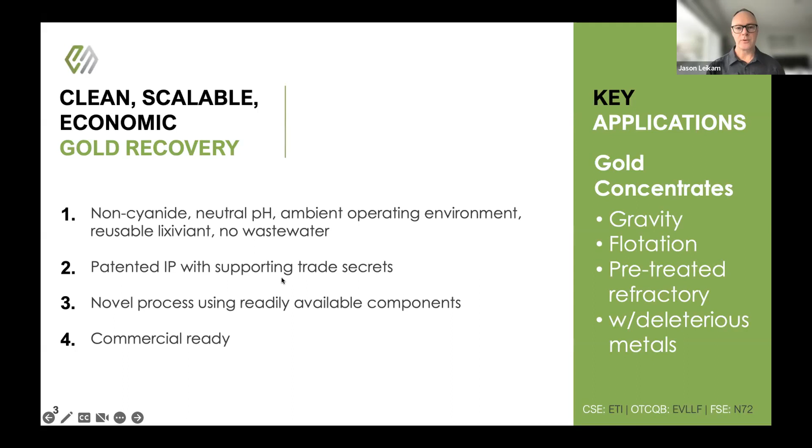We are commercial ready now. And so we feel that the MICA funded project of this recovery plant demonstration circuit will not only deliver continued operational data, but produce improved revenues for our mining partner. The question is, why would mining partners want to consider EnviroMetal? Again, the answer is simple, because if they spend the time to investigate, they'll learn that we can help them improve their revenues on site.

We enable our mining partners to gain greater control because of additional on-site gold recovery. And that's certainly important versus the shipment of concentrate for processing downstream, usually offshore to smelters, incurring costs, treatment charges, sometimes penalties, and certainly shipping costs and the associated emissions related to those endeavors.

Furthermore, our scalable solution enables gold miners to develop deposits where cyanide might be banned, or cyanide is opposed by local stakeholders and communities, or requires very lengthy permitting process timelines. So we can deliver efficiencies in those situations as well. Our process reuses its lixiviant indefinitely. It operates in a closed loop environment, and, as I mentioned, produces no wastewater.

And this wastewater issue, of course, is of particular importance in arid regions, whether that's Nevada, for instance, even California, throughout South America, where gold mining operations are located in areas where there's restricted water use or just a lack of available water. So these operating parameters serve to reduce the maintenance, the monitoring, the remediation costs, but also reduce the environmental footprint for those gold mining operations.

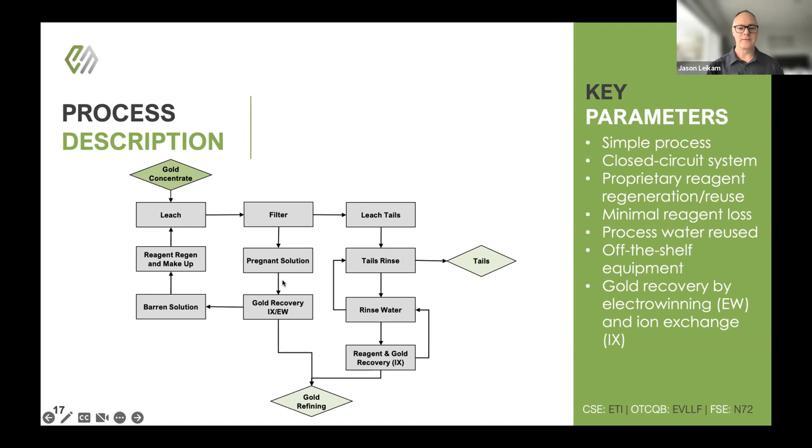At the end of our process, we recover the gold effectively from electrowinning, ion exchange, or a combination thereof. Well, how do we compare to, I've got a freeze here. How do we compare to the incumbents in the industry? How do we stack up against cyanide is a really key question that many of the mining companies that approached us ask, one of the very first questions.

Here's one example of how we compare. In most cases, we demonstrate superior leach kinetics than cyanide. And in many cases, our recoveries are as high or very comparable, in fact, sometimes superior to that of cyanide. In each use case, though, we test the concentrate material to optimize our process for that specific material. We acknowledge that no two mines are really the same when it comes to mineral processing. There could be mineralogy issues associated with even how they affect our lixiviant. So we go through testing in consideration of pH balancing, pulp density, residence time, reagent concentration, and recovery calculations.

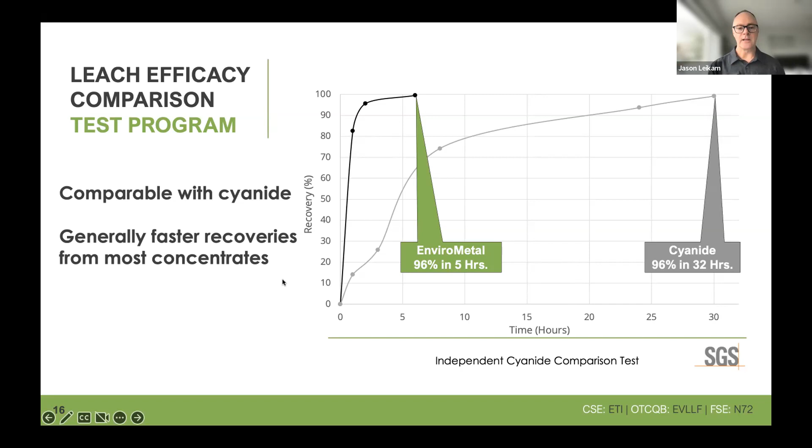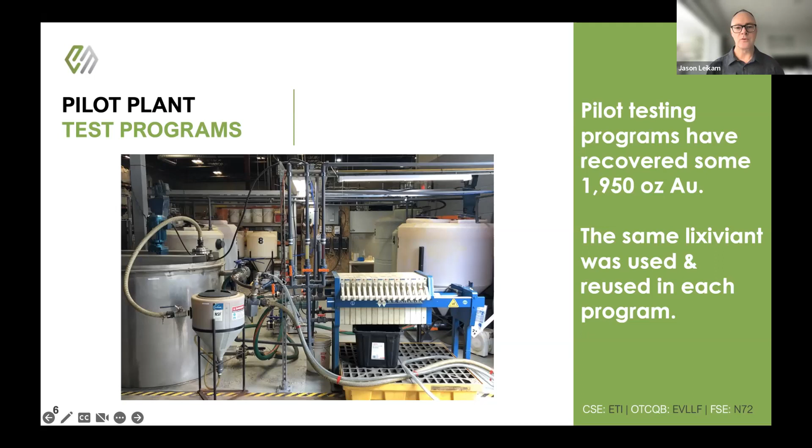Each pilot program has used the same lixiviant, which again is recovered, regenerated after each leach cycle, and then reused for the subsequent leach cycle. The tails are rinsed. You see the small filter press there. So we rinse those tails to extract any of that entrained lixiviant and any attached gold associated with that lixiviant. Ultimately, very minimal amounts of reagent are lost to tails, and those small amounts of reagent are associated with the moisture content in the tails. Thus far, our programs, either on-site or off-site, have recovered almost 2,000 ounces of gold, about 1,950 ounces of gold.

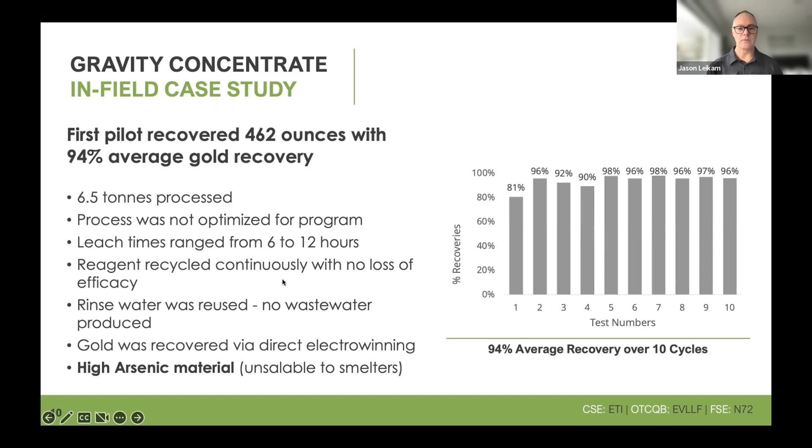You'll note here too that the gravity concentrate contained very high values of arsenic, which rendered this specific material unsellable to smelters. So while this is preliminary data, it still demonstrates very strong validation that the EnviroMetal process can be adapted for use cases where there are high levels of deleterious metals, such as arsenic or antimony. These things negatively impact the marketability of concentrates, and yet we can recover the gold on site for the mining partners. The second area after gravity concentrates, which are our key focus of application, are flotation concentrates.

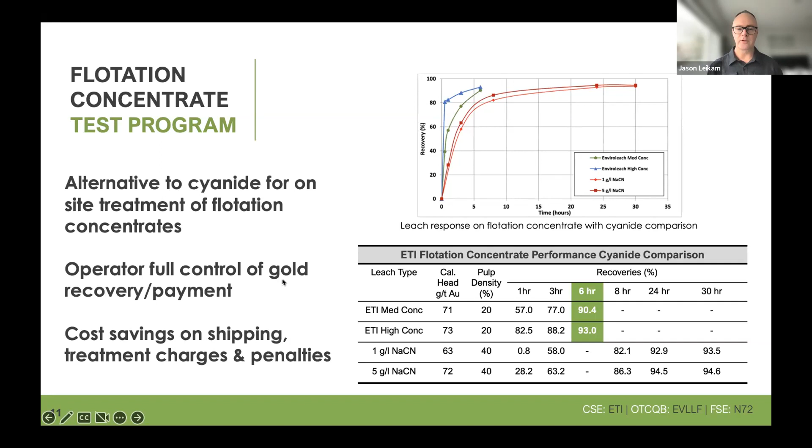So for companies, miners looking for an alternative to cyanidation after concentration, we should be able to provide positive results for you. And that's really important because we realize from our dialogue with several mining companies that they are interested in building social license. They've actually approached us because they want to avoid cyanide on very specific mining sites. So operators need to be balancing social license, environmental footprint with price performance. And that's where we have a solution.

So one key advantage in this application is the ability for the EnviroMetal process to recover the gold without a major pH adjustment. In some cases, the concentrates are in the range of 3 to 5 pH, whereas they need to bump that pH level up towards 10 and 11. And they usually do that in order to effect cyanidation. And they do that through the addition primarily of lime.

So in our test studies, although again, rather preliminary, our internal numbers suggest that our cost associated with treating and recovering the gold from refractory concentrate material can be less than the supply of lime and the costs associated with that. So these costs and process efficiencies are in addition to those already offered with general flotation concentrates.

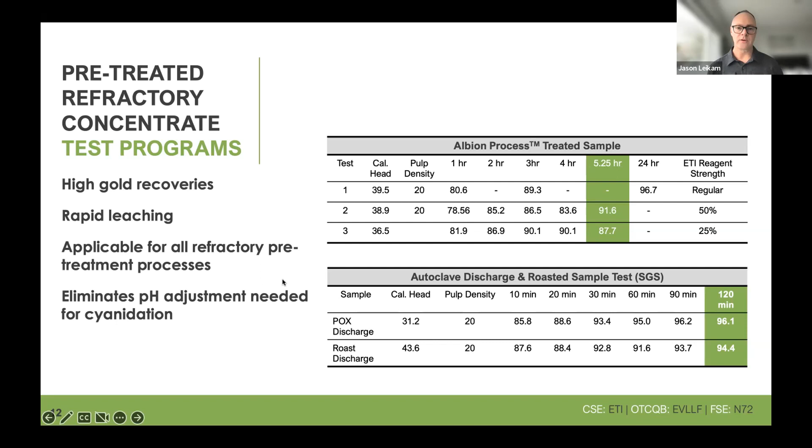So our project is approved by MICA for a 1 ton per day gold recovery circuit, which will be installed in a mine soon to be finalized. We have recently completed our OPEX studies that validate our reagent recovery system, and which therefore defines our most significant operating cost input, that loss of reagent to the tails. We expect to share this information with our mining clients within the next month or so.

We've also already completed scoping level equipment lists and costs, and in early 2023, we'll engage consultants to complete full design and engineering for the demonstration 1 ton per day circuit. And concurrent with that stage of development, we expect to undertake bulk sampling of our client material at our Metro Vancouver pilot facility to optimize our process for that specific use case. Again, that includes pH analysis, pulp density, residence time, and reagent concentration. And these will be very key inputs for the final consideration on the construction of the demonstration plant.

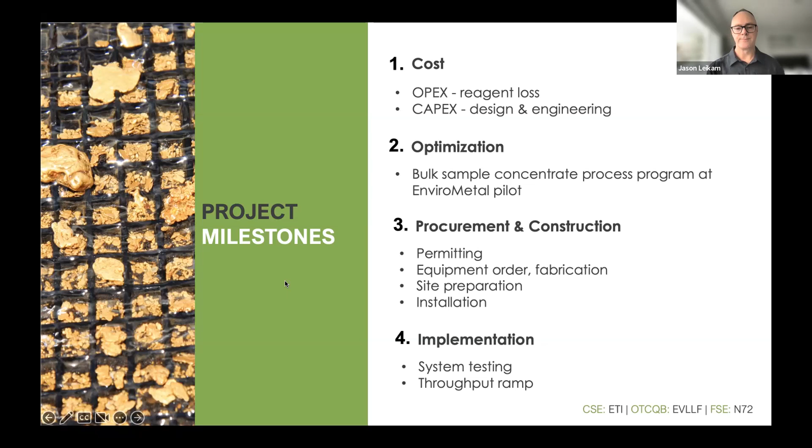Thereafter, just to digress a little bit, we go to construction. We believe the procurement associated with that construction and the construction and shipping to site will take between 6 and 9 months. And thereafter, it will be ramping up operations, testing, and then getting into full operations.

So in summary, the operation of the demonstration gold recovery circuit approved by MICA will generate commercial revenues for the miner. Therefore, we can say we are commercial ready. This project will also demonstrate the mine site economics and efficiencies that will serve as a showcase for gold miners who consider themselves fast followers in seeking new innovations. Presuming project success, we will seek additional opportunities for gravity concentrates, but look to expand the scope of our operations with flotation concentrates here in Canada and abroad.

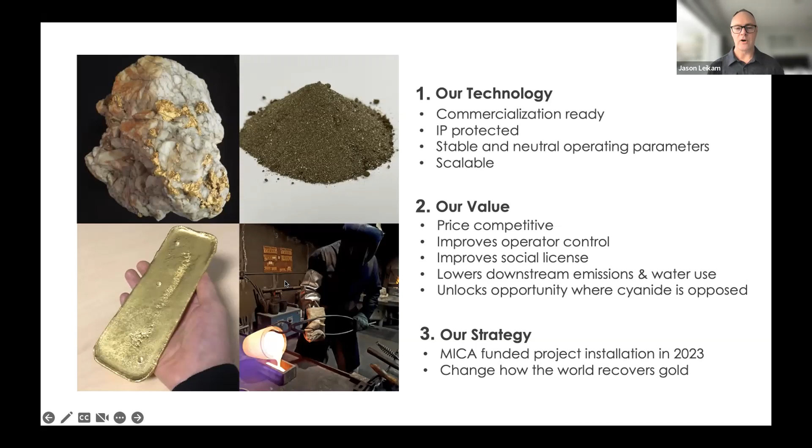Lastly, our IP is sound, it's protected. Our technology is scalable, stable, has favorable operating parameters, and these things allow miners to reduce their environmental costs or footprints and reduce their operating costs, all of which deliver value for the miners and their shareholders.

So what's our ask? For those of you who are in the audience listening, I thank you for your kind attention. We're looking for additional partnerships. If you're a gold mining company looking for innovation to improve your economics on site, please approach us. We're very confident we can demonstrate positive numbers for you.

We are also a startup, like most of the other MICA funded programs. So we are looking for funding, and coincidentally, we have a private placement open right now to fund our operating costs throughout 2023. So if you're interested in discussing that opportunity with us, please contact us.

And if you're not a miner, and if you're not an investor, but you're interested in collaboration, please approach us, because we believe that innovations ultimately have to be collaboratively based. Multiple innovations will provide a better platform for the mining sector in general. So we're looking forward to talking with anyone that might be interested.